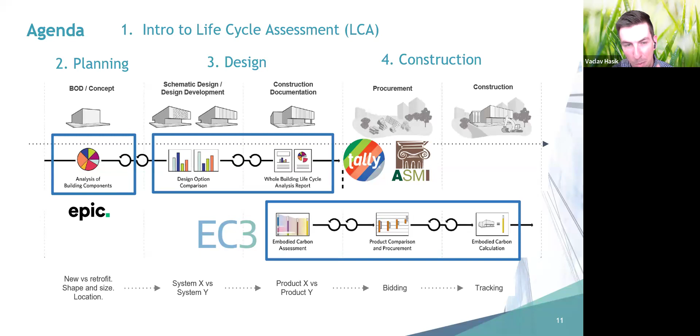The last tool that we'll cover today is the EC3 Embodied Carbon in Construction Calculator tool, which is really focused on the later stages, specifically construction and product procurement. That tool can also be used earlier in design, and I'll show you exactly how, but it really was conceived from the contractor perspective and from a perspective of actually looking at very specific product types in very late design stages.

As I mentioned, there are many other tools, so we obviously can't cover all of them today, but I hope that the ones that we cover today, since most of them are free to use, will be actually useful for you on a regular basis.

If there's anything you take away from today, I would like for there to be at least one thing that you can take to your actual practice and start implementing into your design and construction process, one at a time, essentially, in terms of trying to lower the carbon footprint of whatever you're working on, residential buildings, commercial buildings, even infrastructure projects.

So let's start with the intro to LCA, and again, this will be relatively high level. I will be throwing these terms around, so life cycle assessment, or LCA, is the general approach to quantifying the environmental impacts of products and processes. And I have a slide next that goes over the various life cycle stages. Again, this is going to be very high level.

Whole building life cycle assessment is the same exact approach to quantifying environmental impacts, but specifically to buildings. And specifically, it's typically connected to tools that have specific features for architects and engineers to help quantify the amounts of materials in a project.

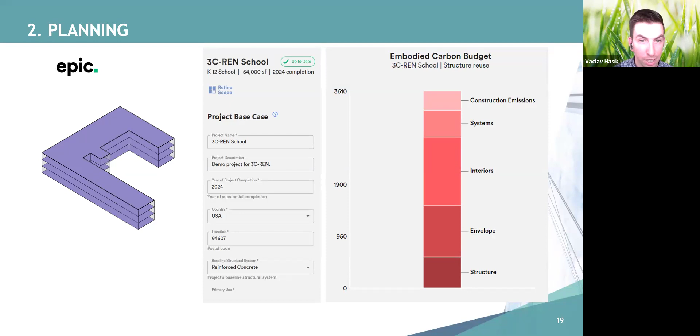So this is all based on historical results, and there are various aspects of this tool, which I'll show you in a second, that help you also preliminarily analyze, hypothetically, if you were to choose specific types of structures or specific types of design strategies, what the initial expectation of reductions or increases of embodied carbon could be.

So with that, we will be looking at a specific hypothetical project here. I am actually using one of the Autodesk Revit sample projects because we'll later on be looking at a specific Revit project. But here is the basic information about the project that we'll now be entering into this EPIC tool. So we'll be talking about an educational building. It's going to be a high school building of about 5,000 square meters gross floor area.

The expected building lifetime for the entire analysis will be 60 years, but there is a caveat with the EPIC EHDD tool, which only looks at a 30-year lifetime. There are differences for the calculation of the replacement impacts of specific materials. For those replacement calculations, you need to understand the service life of specific components, and then you need to understand what the total expected building lifetime is, right? So that's where that 60 years is important. It's also a 3-story building, and so we will have on average about 1,670 square meters of floor area per floor system.

So now that we know the basics of this building, let me switch over to my browser. If you wanted to follow along, I will actually drop the direct link to this tool into the chat box, and feel free to follow along. The address is epic.ehdd.com. Now, I've already logged in, so if this is your first time logging in, you will need to register for this tool.

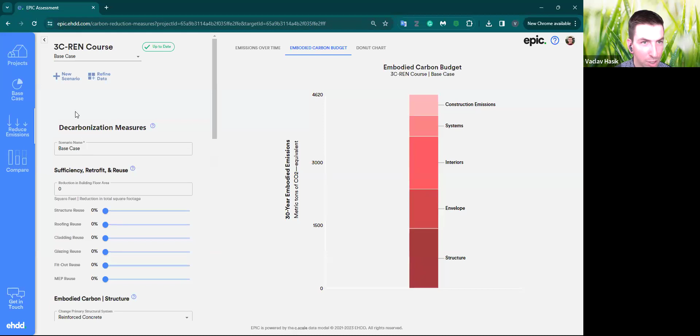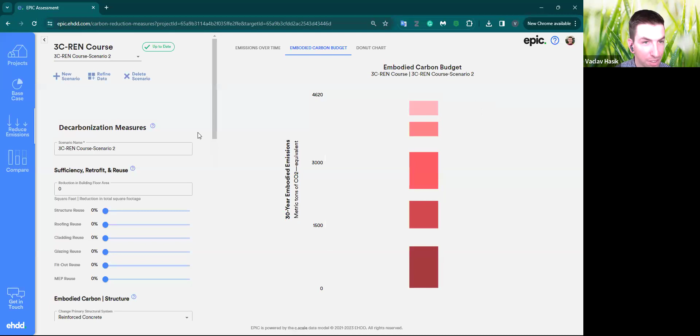So for now, I'll save this base case and I'll create a new scenario. And we'll start with a new empty scenario. This will just take the base case with all of the default settings and create a new scenario that we can now modify again. Okay, so now we'll look at another broader decarbonization measure, and that will be reuse. So you might not know this, but reusing structural systems that use high amounts of concrete and steel is obviously going to enable you to reduce the embodied carbon footprint of your project very easily, because you're essentially avoiding the remanufacturing of some of these high impact materials. We'll look at a scenario where we reuse the structural system specifically.

So I'll name this scenario reuse. Actually, reuse structure to be specific. And right now we can just use this slider. It's again very easy to use. And let's say we reuse 85% of the structural system. I'm using this based on one of my previous projects, where I worked on an adaptive reuse project where we reused pretty much the entire structural frame of a building. And in that particular project, we were able to reduce, or essentially avoid, about 75% of the embodied carbon emissions.

In our case here, if you reuse 85% of the structural system, you can see that we achieved a reduction of 1,430 tons of CO2 equivalent already. So it's not quite 75%, but the reason for that is because this is including a lot of other systems that I didn't actually include in my previous estimate. My previous estimate was in structure and envelope. This is including MEP systems, interiors, and other things as well.

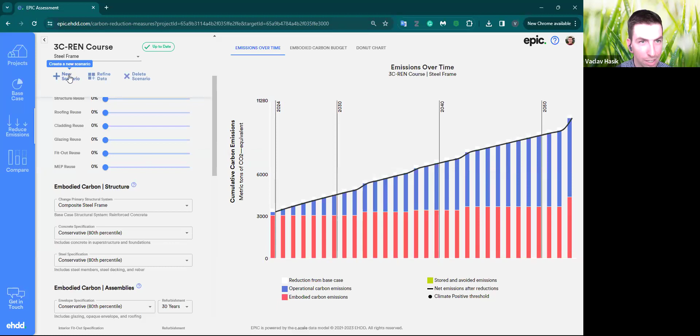Okay, so now let's try and see what mass timber impacts would look like. So we'll create another new scenario, new empty scenario. And back under the embodied carbon structure, we're back to the default, which is reinforced concrete. We'll click on mass timber, click away. And again, you see a little bit of a reduction, but not too large. So you see 210 tons of CO2 equivalent.

Usually bio-based products or wood-based products do have lower embodied carbon footprint because the production impacts or the direct emissions during production are not usually as high as steel and concrete. In this case, for some reason, the reduction actually wasn't that large. It may be because the amount of mass timber actually needs to be larger than some of the other materials to support the same loads within the building. But that's currently just a hypothesis that I have.

Again, this is based on historical amounts of material quantities for specific structural systems. So when you're looking at these specific designs later on, the numbers might vary a little bit more.

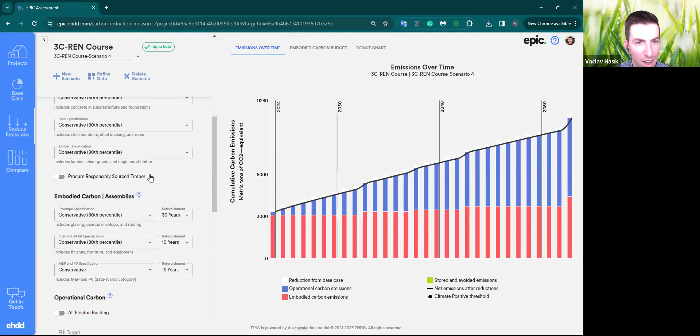Now, okay, so let's say we also wanted to specify that this mass timber was actually procured from responsibly sourced timbers, so something like an FSC product. And in this case, I'll create this as a new scenario to be able to show you the differences in those final results later on. In this case, I'll actually copy the current scenario with the mass timber structural frame so that we don't have to make that selection again.

But we will add the differentiation here that the mass timber frame is actually with FSC wood that has chain of custody certification. In this case, if you click on the procure responsibly sourced timber here, you can potentially claim additional reductions, basically the amount of carbon sequestered in the wood itself. But you need to understand that in order to be able to take that credit, or to tell people that there's actually sequestered carbon in your timber, you need to make sure that that timber is sourced from sustainable supply chains, from sustainable forests.

So essentially, this tool is just telling you, you want to make sure that you do your due diligence when you're sourcing the materials, that it checks all these boxes. This is essentially saying that you cannot claim that carbon sequestration unless that wood in the forest is actually replanted and that tree can regrow in the forest. This is to ensure that you're not contributing to deforestation, essentially. This is a little bit of a tricky topic, so that's why this checkbox system and not something more sophisticated.

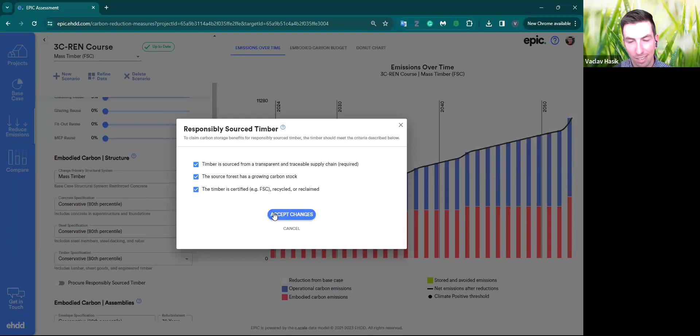There are currently still ongoing standardization efforts and accounting methodology efforts around standardizing the way that sustainability of wood is actually captured in EPDs and life cycle assessments. So these checkboxes and your individual due diligence is all you can do here. And you can see that in this case, we actually get this yellow negative value, which is called stored and avoided emissions. And in this case, it's about 760 tons of CO2 equivalent that actually gets stored in the building in that mass timber.

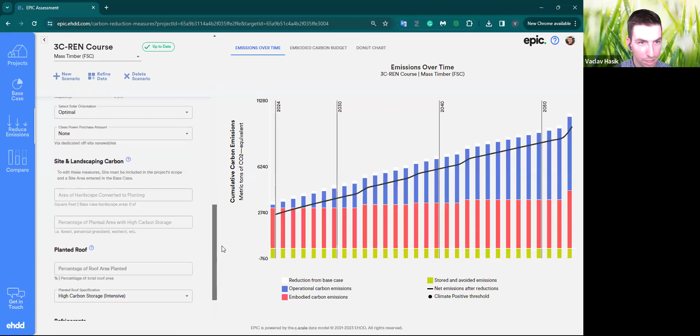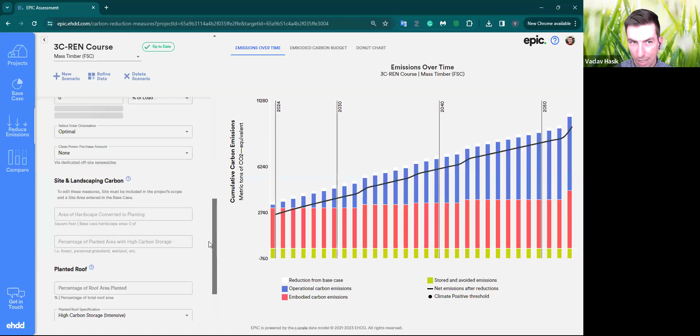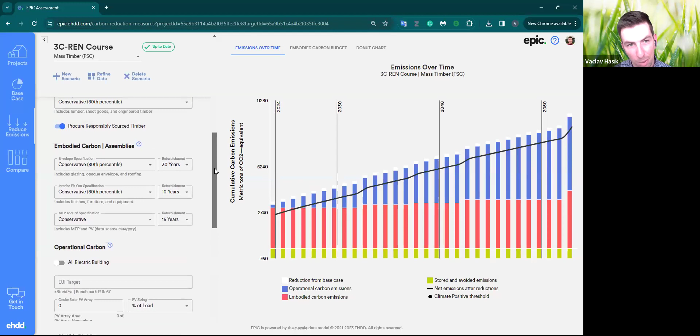Okay, so now we've explored a couple of different scenarios. I think I saw someone in the chat actually asking about low carbon cement products. And the answer is that there is an option in Epic to select low carbon concrete specifically, or at least lower carbon concrete, but you can't select specific product types. So I think Sublime here, that's a specific type of product from a specific manufacturer. You won't be able to actually select that specific product, but you will be able to try and see what a low carbon concrete would do if you were still, for example, using that concrete frame.

So we'll go and create our last scenario for this analysis. We'll click on new scenario here, new empty scenario, and we'll say low carbon concrete.

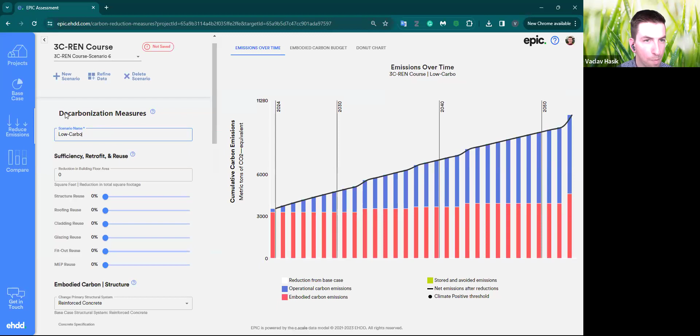We will stick with the reinforced concrete structure, but here under concrete specification, we will actually say low carbon. So 20th percentile will essentially lower the emission factor per unit of concrete on the project to one of the lower impact concretes. And in this case, again, you see a little bit of a reduction of 170 tons of CO2 equivalent. So not as big as reuse, but it is going to be significant when you start looking at just the structure and just the concrete specifically.

You can probably lower the impact by about 20–30% just if you're looking at just concrete on this project. We'll get to some of the specific amounts of reductions per material type towards the end of today's course as we start looking at specific product types using the EC3 tool. So we'll come back to this again.

Now, I mentioned earlier that when you're looking at these different scenarios in the Epic tool, you can switch over to the embodied carbon budget section. And here you can see the impacts from the specific systems within the building. And this is going to be important later if you're trying to actually compare your early Epic estimates to other estimates using other tools. You will want to make sure that you align the scope of the analyses as much as you can. So for example, later on, we will be looking at impacts from the structure and envelope only. And so in those cases, when you're doing the comparison, you would want to take only the structure and envelope impacts from this Epic tool.

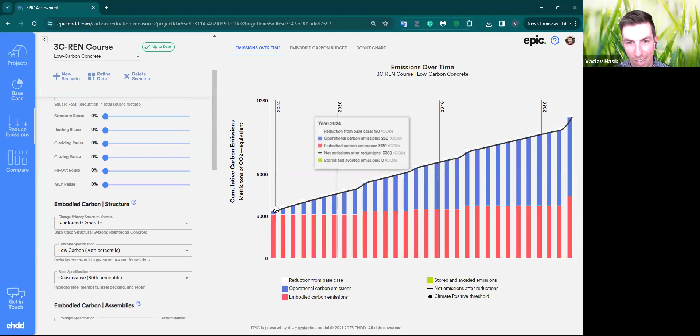Now, we defined a bunch of scenarios and we looked at the reductions for each of them one by one. Now, let's take a look at them all at once in this compare section. So now I click on the compare button here. You can see the base scenario right away, and then you can see the other scenarios that are selectable down here. So we had the copy of the base case, reuse scenario, steel frame scenario. This one I didn't actually rename, but I think that was the mass timber scenario, mass timber FSC, and then low carbon concrete. I'll start showing all these scenarios, and now you'll be able to see side by side how they actually compare over the full 30-year lifetime of this project.

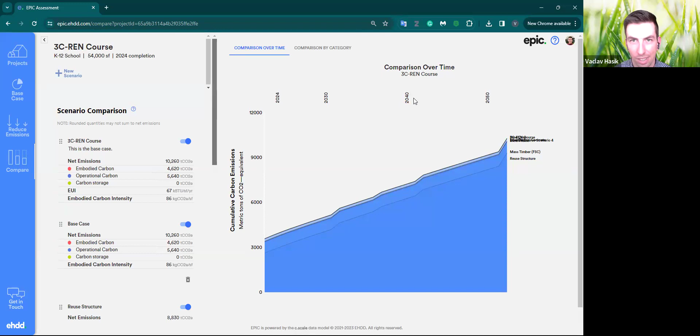You can see that the reductions are not all that great, but again, if you only look at the structural systems, for example, those are actually some significant reductions there. You can also look at it by category, and so you can see the differences in the embodied emissions in the pink here a little bit nicer. You can see that the reuse of the structure really had the largest change for the embodied carbon aspects. And again, you haven't really touched the operational emissions, but if you wanted to use this for a holistic carbon footprint analysis at the planning stage, you can make some additional tweaks for the operational aspects.

Now, at this point, if there are any questions so far on the use of the tool and how you basically get the initial estimates of the embodied carbon footprint, let me know. Otherwise, I will switch over to a Word document. Let's see if there's any questions first.

Is this program accessible free of charge? Yes, it is. So most of the tools that I'll cover today are accessible free of charge, or at least have a free trial.

Okay. I think some of these other questions on specific types of materials we'll be able to come back to later as well. But what I wanted to mention here is, okay, well, you have this planning tool. Where might you be able to use it in terms of your basis of design or contract language?

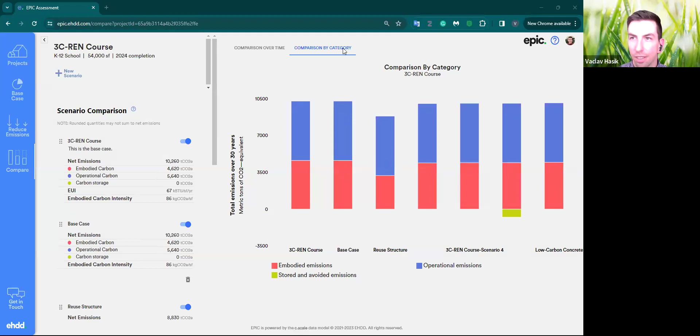So let me switch over to the PowerPoint presentation again. And we'll switch over to the next phase of design, which is typically design development and schematic design, right? So this is where you might start actually understanding more of what the individual assemblies on a project are. Some of you may be using Revit, which is what I'll start with today, but I'll also show you some tools where you don't need to have a Revit model. You can still do some of the more detailed and specific analyses once you start having a more specific idea about the design of your building. You can do these embodied carbon assessments in a variety of ways.

The first tool that I'll walk through is Tally LCA. This is our own Building Transparency tool. It was actually started by an architecture firm out of Philadelphia, KieranTimberlake, around 2016. So it's been around for a while, and it's really focused on making this process of assigning specific material impact information to a Revit model very seamless. And also it provides a nice library of specific material types, and then has a pretty comprehensive, but also not overwhelming report, I think, for anyone that's trying to address life cycle assessment on embodied carbon for the first time.

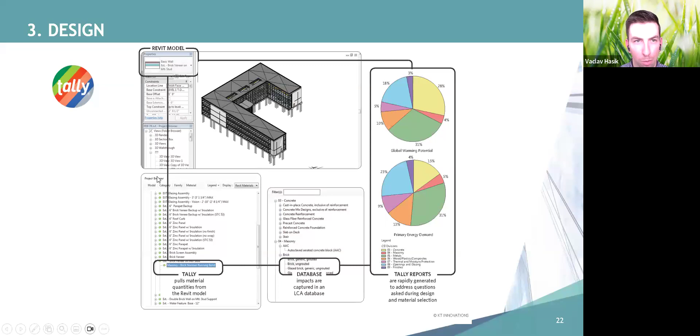So what this tool does is it takes some of the existing dimensional and material information from a Revit model. It allows you to connect the Tally material library to individual elements within the Revit model, and then generate these Tally reports. So I'll switch over to my Revit interface.

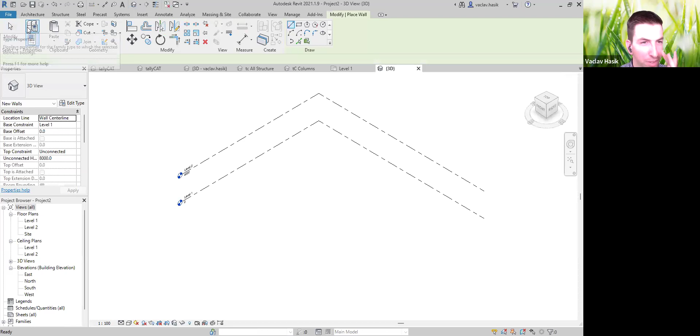And again, the idea is to take all of the native features of Revit in terms of modeling, and just add a little bit of additional feature in terms of the environmental impact assessment using the Tally add-in. So at this point, I'll just do a simple example where I'll place a couple of wall systems here.

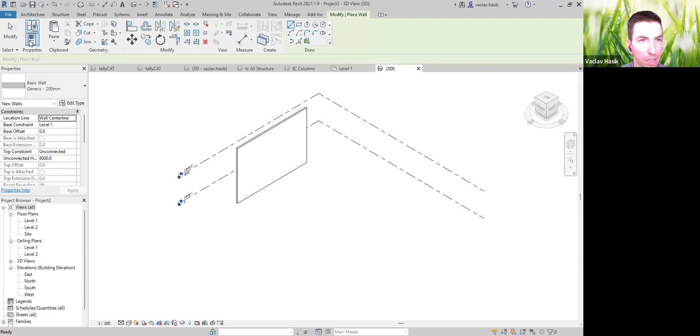So I'm placing one of the basic generic walls. Again, you don't need to actually define any of this yourself. If you're starting with a blank slate in Revit, you will have some predefined families already available. I just clicked on another wall system, and we'll add another type of wall into this project. So we'll do, for example, this exterior brick on metal stud. And we'll just do the same section of the wall, and that's it.

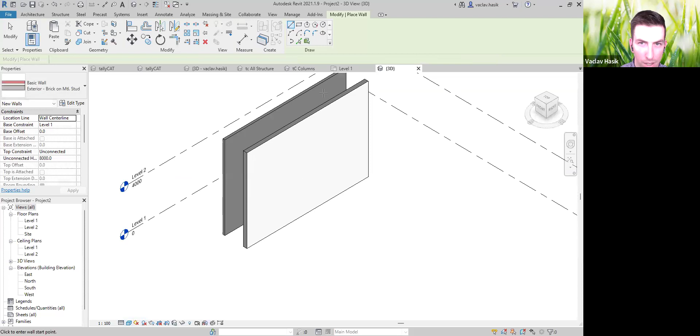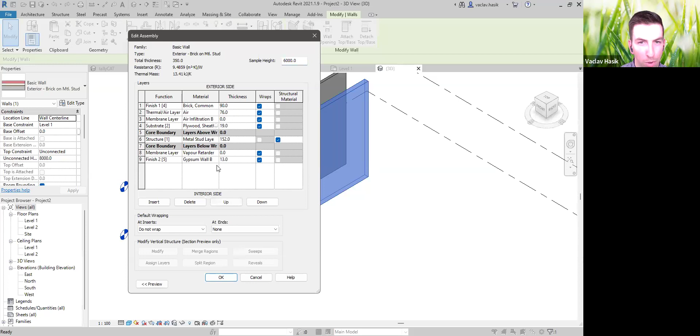Look at the consistent colors here. You can't really see right now that there are multiple layers, but if I actually click on one of these wall systems and then go into the edit type section, and then into the structure section, you will see that this wall system has about 7 individual materials within it. And you can see that there are specific thicknesses of each of these materials. So we have brick, air barrier, plywood, metal stud layer, vapor retarder, and gypsum wallboard. So again, this is the way that the Revit wall family was actually built.

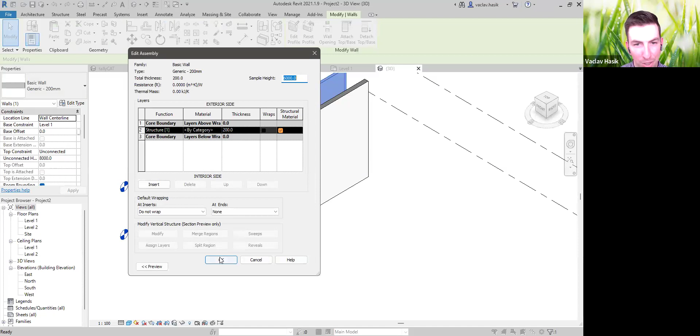Okay, now the other wall system, if I click on it and edit type and go into structure, you can see that this one only has 1 layer. That's just the basic generic wall. And it actually doesn't have any material assigned to it, at least the Revit material. So we'll just leave it at that, but just keep that in mind as we switch over to Tally LCA.

Now, to start Tally LCA, you would go into the add-in section here, and you can go into the Tally LCA. We'll have this colorful icon here called Tally. You can click on that, and it will bring up the Tally LCA plugin. Now, when it says downloading updates, that is the only time that the tool actually goes into the cloud. It's downloading all of the materials in the Tally library and the associated environmental impact information that's in our database.

When you're actually working on your projects, all of that project information just stays within the Revit file itself. It's not actually sent anywhere outside of your computer. It's not stored in any of our servers. Sometimes I get that question from Revit users for security purposes. So all of the information stays with the Revit file, and you will want to save the Revit file itself in order to save all of the lifecycle assessment work that you're doing in Tally.

The first step in Tally LCA is selecting the object of the study. The most typical object of study is going to be full building study. This essentially just takes account of all of the placed elements in the 3D space, and then you will be able to assign material information to the individual elements. The next step is selecting the scope of the study. So again, like I mentioned before, you have structure, envelope, interiors, MEP systems, site elements, etc. The list of categories that you see here is the full scope that Tally LCA is capable of helping you assess. So it doesn't actually include any MEP systems.

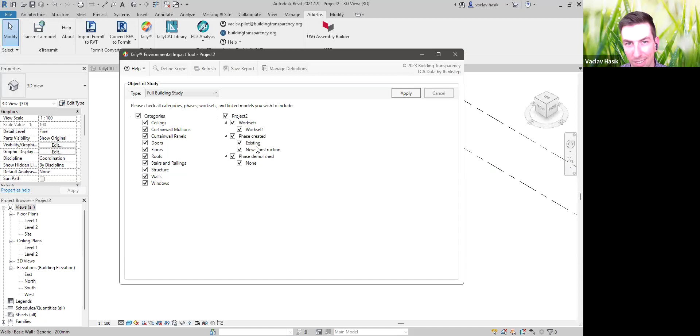And then you can include or exclude based on some of those characteristics that each element has assigned to it. Once you select the scope of the study, click on Apply. Now the tool is collecting all of the dimensional information for the various elements that are placed in the 3D space. And the next step is assigning material information from the Tally library.

So you go and we can see those two families that were placed here. And if I open up these triangles, you can see the individual layers within that family. So this is what I meant when I said that you do need very detailed information for being able to do the life cycle assessment. Each of these layers is going to have very different mass, very different volume, and very different environmental impact information, right? And so you do need to understand each of the individual layers in a realistic wall system.

You see that in this generic family, we do still see that one layer, but it doesn't actually say what the material is. It just says by category. And so I'll show you how you can address an assembly like this. But the next step would be, again, assigning specific materials from the Tally library. So you can right-click the individual elements, click on Edit Definition. And now we were looking at a brick element, right?

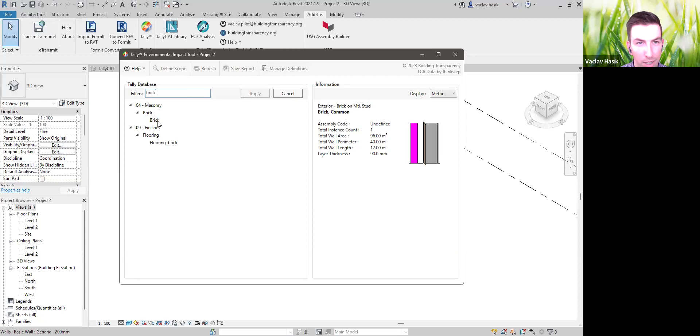So I could go into masonry and I could just try and find brick in the library, where you can type in brick in the filter here, and it will find you a couple of different types of brick that you could select from the Tally library. In our case, we'll select brick, click on Apply, and then on the next window, you will need to select a more specific type of brick, because again, even within just saying that you have a brick, there are many different types with different manufacturing processes, so the impacts can be different.

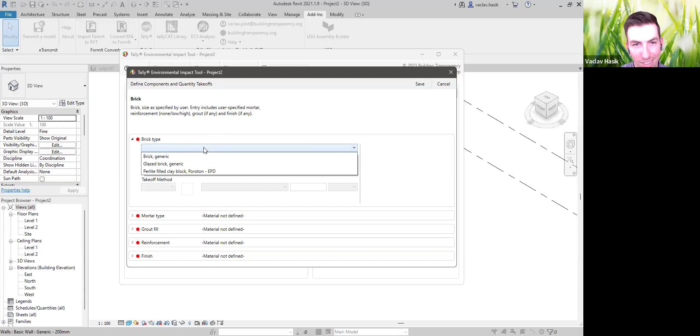If you don't know which type of brick you should select, the first one is usually the most generic data source that you can use. You can select various service life. This is again for calculating the replacement impact, so we'll just keep that at default. And then you would also select the takeoff method that you want to use to get a realistic quantity takeoff for this type of material.

As you may know, in Revit, some of the modeling is simplified. So sometimes you just specify what the thickness of a layer is, but there is no understanding that, for example, studs are not actually the full volume of a wall system. They're actually thin amounts of metal spaced a certain amount of distance from each other. So Tally LCA helps you address some of those specific and realistic ways of quantity estimating some of the material types. We'll go through studs specifically in just a second, but this whole interface is set up to help you define the additional information you need to get the accurate quantity estimates for your building.

So in this case, you usually have multiple takeoff methods you can do. If you think that the modeled layer in Revit is accurate to how the product actually is produced, then you can simply use the takeoff method that is typically first or the most straightforward. In this case, you could just take the full volume of that one layer and assume that it's a solid brick, right?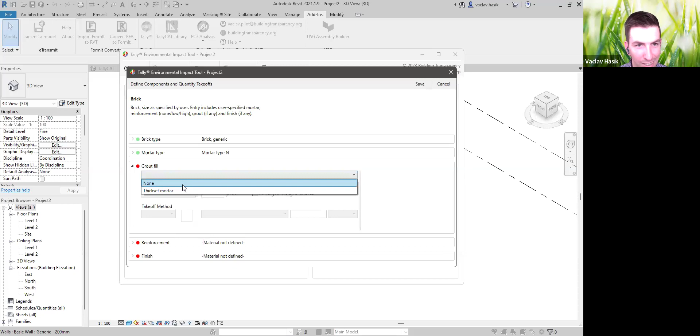So you can select different mortar types. I'll just randomly select some of these. You can do by volume again, and then we can select the same joint size here. And that fills in the rest of the volume of the wall system with the mortar. You can also add grout, again, just the same exact way. Different takeoff method options. And in this case, it's taking it into account 16% by volume.

And you can also add reinforcement, etc. I think you get the point at this point. You can add additional materials that would be within the brick layer in a wall system.

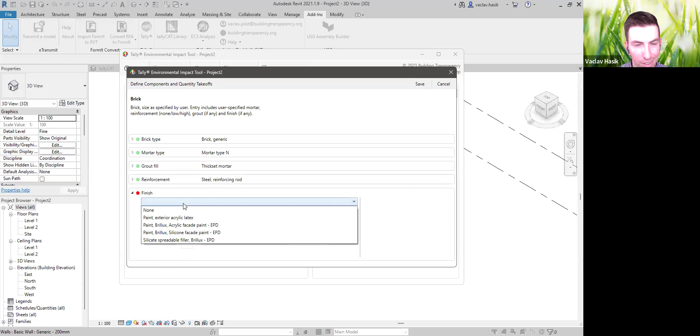We'll do some predefined reinforcing amounts, and then for finish, I actually won't. I don't want to add any finish, so I just click on the none selection here. Save that definition, and at this point, this will turn green. That means we've addressed that layer.

And you can see the amounts of individual materials in terms of mass. You can also see the takeoff methods that we used and how we defined the materials. You can see the full list of individual accessory materials added.

If, for example, you have something like this, where you have air, it's essentially just an empty layer, you can set this layer as a dummy material. That essentially means there are no impacts associated with this layer, but it just means that you've checked it off the list and you can keep going down in terms of defining additional material types.

I will define one more type. So this metal stud layer, I mentioned that earlier. We'll click on that, edit definition. I'll search for stud layer, C-stud metal framing. There's also an option with insulation. So you can either have just the stud or you can have the void filled with insulation here. I'm just going to go for the regular stud without insulation.

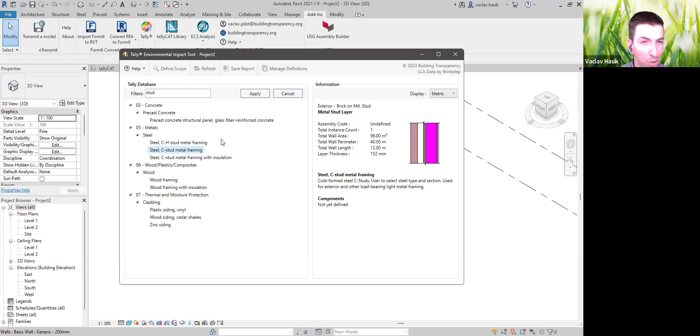At this point, I can select the material type. Again, the most basic one is the first one. And in the takeoff method, instead of doing by volume, which would just take, again, the full volume of the layer and grossly overestimate the amount of metal, instead I'll do this takeoff method by spacing. And so in this case, I can select from a predefined list of stud profiles.

In my case, I don't actually remember what the actual model thickness of the wall system was, but let's say it was 3 5/8 inch, 20 gauge stud. Now I can select the spacing and I can include or exclude perimeter members here. So let's say it was 16 inches on center. I can save that. Come back here and we have 209 kilograms of cold formed structural steel in the framing based on those definitions.

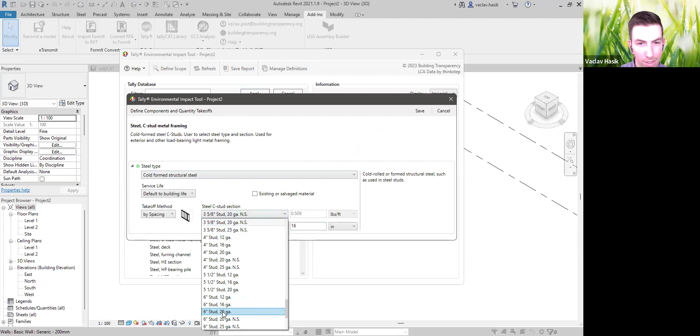Now, if I wanted to actually compare, the layer thickness is about 6 inches. So this actually doesn't quite match up with what the modeled thickness of the layer was. So I could go back, right click it, edit definition, apply. And I could actually specify that the profile was more like 6-inch stud, 20 gauge. Save. And you can see that this is 987 pounds of cold formed structural steel.

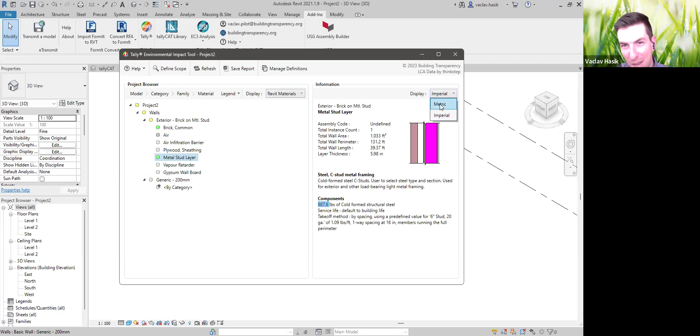Actually, I've been switching between imperial and metric units, and apologies for that. There's a lot of overlap or changes and mixing of the units that you will see in life cycle assessment, unfortunately. But most of the tools try and give you tools to be able to switch from one unit system to the other. So I think originally we had something like 200 kilograms of cold formed steel. Now we have 448. You can see almost double the amount.

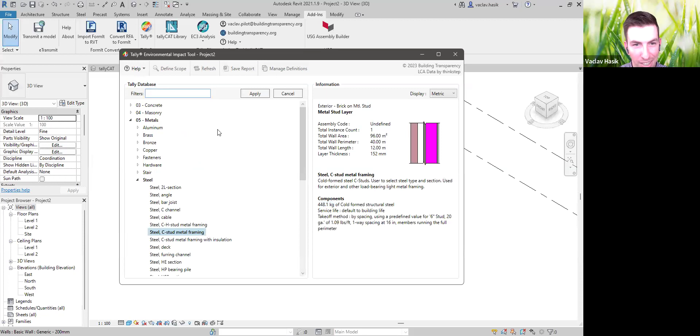Again, just to make the point clear, if I went back again, did a takeoff method by volume, just did 100% by volume, I get 114,000 kilograms of cold formed structural steel. So that's obviously incorrect. So this is just a couple of the features that the tool has to help you come up with the right quantity estimates in your project.

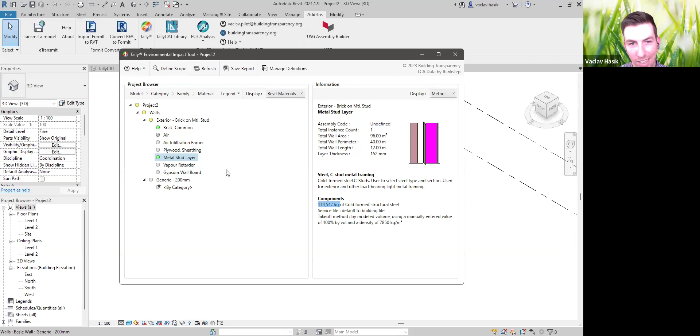In this case, with the assembly where we didn't actually have specific layers, I won't be able to edit definition here because the Revit material is not specified. So either I would need to select that element and then go back and edit the type in Revit and select the specific Revit material, or I could just add additional accessory materials in Tally LCA without actually modeling anything in 3D.

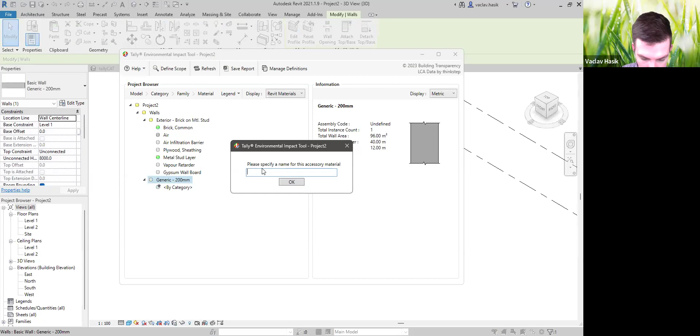So I can add accessory material, say we have a stud layer, and now I can go through the whole stud layer definition process all over again without actually having anything modeled in Revit specifically. So you can start doing some of these assessments even in early design before actually having any of the layers fully defined. You can start exploring what the impacts could be.

So now that we've walked through the basics of how to define materials, are there any questions so far? I'll switch over to the fully defined model and start actually looking at some of the results from Tally LCA. But if there are any questions so far on the material assignment portion, feel free to let me know.

Oh, here we go. Can you upload EPDs to Tally LCA? Currently, no. There are a couple of EPDs, as you probably noticed, but those are more legacy EPDs. Tally LCA is focused on, again, the earlier design phases, and it's really focused on giving you an assessment of the average impact of individual materials based on the general market conditions. So most of the EPDs that you will see here are going to be industry-wide EPDs and industry average impacts of the individual materials. You won't see too many product-specific EPDs.

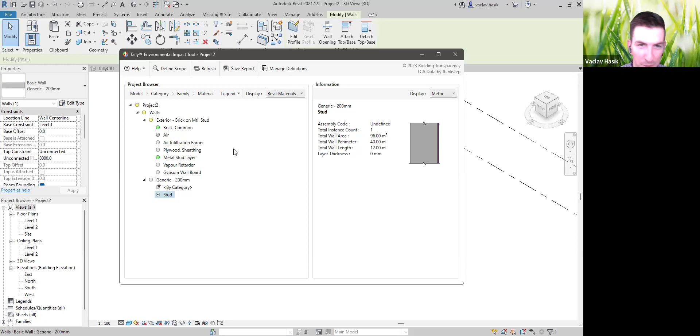When it comes to the non-carbon footprint impacts, which you'll see in a second, like acidification, eutrophication, etc., the life cycle assessment system is more all over the place, and there isn't a clear translation or conversion that you can do sometimes from one unit of, let's say, acidification to another unit of acidification. But again, it's a larger topic. What we actually plan to do with Tally LCA in the future is potentially give a carbon footprint specific option, and in those cases you would be able to use some of the EPD data. Again, we'll come back to using product specific EPDs when we start talking about the EC3 tool as well.

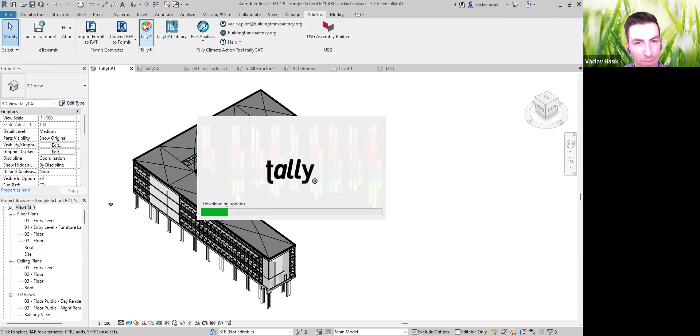Okay, so now let me switch over to the fully defined model that I have here. So again, this is the Autodesk Elementary School sample project that you can access yourself as well. So if you wanted to try this on a sample project, you could try and define the whole project yourself. I'll reopen Tally LCA here on this project. I'll go into the full building study. Again, select all of the categories, all of the work sets. You actually see that I have more work sets defined here. And I also have a linked model, the structural model. So I'm now including a separate structural model as well as the architectural model, which focuses on the envelope and some of the interiors. Click on apply.

Now this will take slightly longer than the last assessment with just the two wall systems, because we have way more elements in the project. But even on large projects, this shouldn't take more than about a minute. At this point, you can see that we have more of these categories here. The linked model I can see, but I cannot modify the elements. So if you wanted to, for example, change the definition of the cast in place concrete in the structural system, you would have to open up the original structural model to edit it. Once it is edited, you can create results from both models all at once. It's just the editing part that is not accessible here.

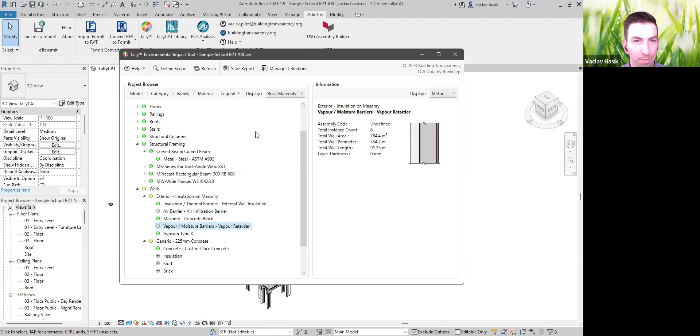And you can see that all of my categories are green. That means that I've defined all of the individual layers, except for the wall system. So it looks like I didn't finish something here. So this would be a quick way of seeing, yes, there are a couple layers that were not defined. I should probably address them. In my case, I'll actually skip over this, and I want to get to the results part of the tool so that you can start understanding where some of the contributions from an embodied carbon perspective are coming from. So we'll go over to save report here.

Now here you fill out similar basic information about the project as we did in the Epic tool. So you have the title of the building, author, project address. You can add an image as the cover. And you do want to fill out the gross building area, because once you start comparing to other projects, or even to the initial assessment of the Epic tool, you probably want to do that on a per unit area basis, a typical way of comparing results. And again, you have the expected building lifetime here.

The default is 60. You can make this any number that you want. But again, for something like, let's say, LEED certification, they will actually ask you to use 60 years. Most of the certification schemes will ask for 60 years.

And then in the goal and scope, you would just describe exactly what you were doing in this assessment. For example, was this an early design development assessment where you were just quickly trying to fill out all of the individual layers? Or is this more of a construction documentation phase where you've actually gone through each layer, documented or cross-checked everything with construction documentation? And so essentially this is more of an actual design that you are then handing over to the builder, right? So you would want to specify all of that here. I'm just gonna type in test and skip over that.

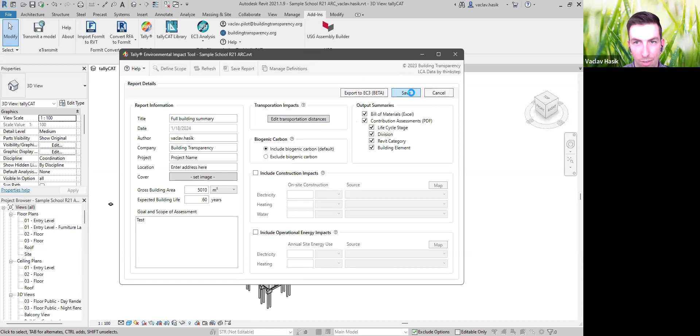And to generate a report, you would click on Save Report here. So we will save a building design one. Okay, now Tally is saving two things. It's saving a PDF report and an Excel report. The information is exactly the same in both places, but the PDF report has all of the methodological information, all of the text and write-up that you would probably want to have if you were handing this over to your client, or for something like the LEED submission. It includes all of the documentation with all of the details of how the tool works as well, and all of your specific material selections.

For the Excel part of things, it's basically just giving you all the detailed results. Not sure why this is stuck right now. Got stuck because I had the same PDF report already open. So anyway, you get the PDF report and the Excel report. The Excel report just has everything, all of the numbers accessible to you, so you can potentially create your own diagrams if you want.

I'll start with the PDF report. So here, this is blank because I didn't actually provide an image of the project, but you could do that. On page 3 is where you see the first set of results from Tally LCA. So here, you can see the upper table is the absolute values, and we include the global warming potential as well as the additional environmental impact categories, which is something that I just mentioned a second ago. Again, embodied carbon footprint is the global warming potential part.

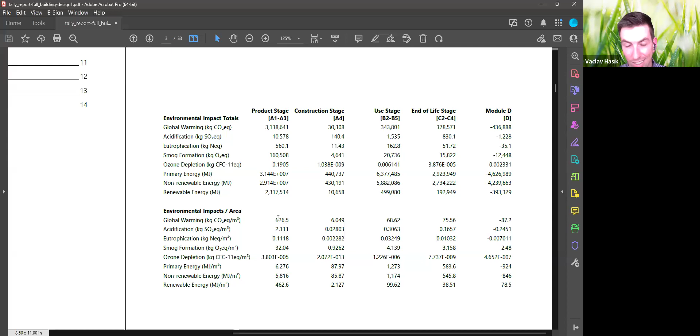Typically, the early estimates from tools like Epic just have also large uncertainty, which is not necessarily shown. So I think the typical range can be plus minus 25% from those early estimates. And I think this is within maybe a 20% difference, if I remember correctly. So those are just some of the things to keep in mind when you're actually switching between one tool to the next: some of these differences in the quantity estimates and in the total impacts.

And so now knowing this, we could do a couple of things. We could see, okay, are these systems where we could actually substitute concrete with some other material? Or later on, once we actually look at EC3, maybe we could just tell the concrete suppliers that you are calculating the embodied carbon footprint of your project and ask for suggestions on any low carbon mix designs that they may provide. So those are two options that you could do.

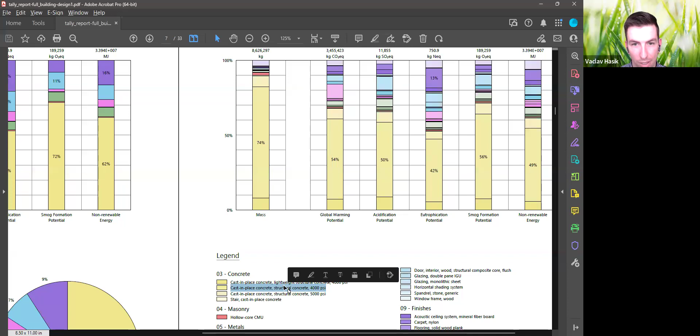So in order to know where this cast in place concrete is actually within the building, I can go to the back of this report and look for concrete cast in place 4,000 PSI. Going into the documentation section in the back of the report, going to see structural concrete 4,000 PSI. And now I can see where exactly that concrete is. So it's in the concrete deck. It looks like probably some wall systems here, or probably some floor systems. And then the concrete frame.

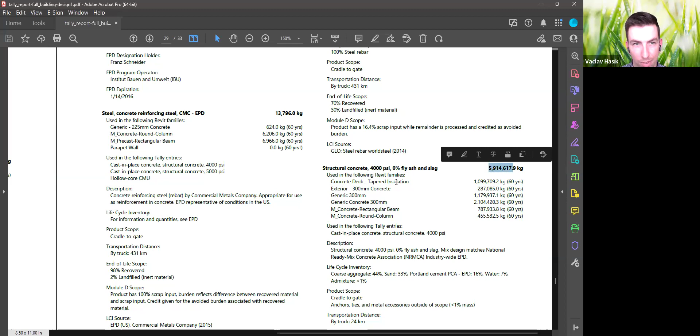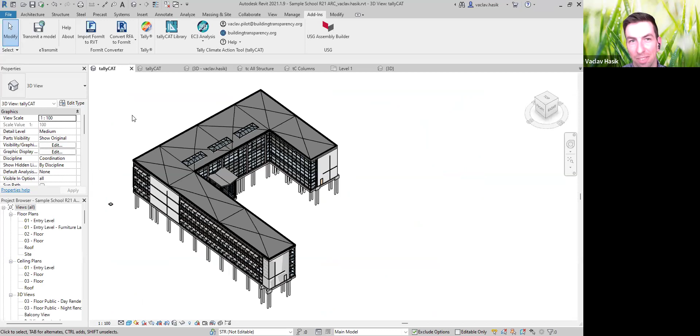Right, so you can see that you have 5 million kilograms of concrete. That's a large amount of concrete on the project. Okay, so what we could do from a design perspective is consider some alternative designs, probably for the slabs or for the frame. Now this can get pretty complicated, so I won't go into the details of how you actually come up with different structural designs. But if you did have different structural designs modeled in Revit, you could do that quick comparison

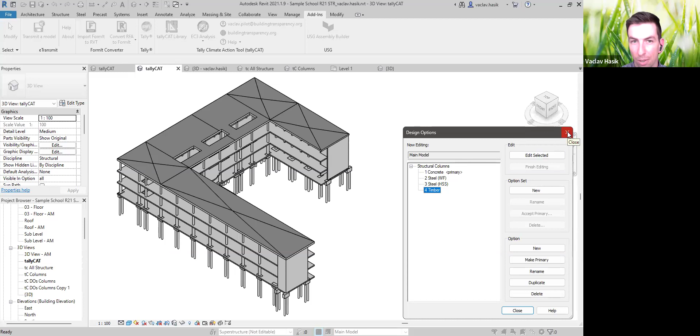again using LCA. So I have my structural model here, and in the Revit design option comparison section, I have 4 setups of different structural systems. I have concrete, steel with wide flanges, steel with hollow sections, and then timber frame. Now keep in mind, these are not actual designs, so some of the results may not be realistic, but this is just to show you how you would go about using the tool to actually compare some of these design decisions.

So I have those designs selected. I can actually show you if I switch the design options in Revit. You can see now we have the wide flange sections. And now we have the timber frame sections. And if I go into Tally LCA again, I could now go into design option comparison, select all of the design options, click on apply.

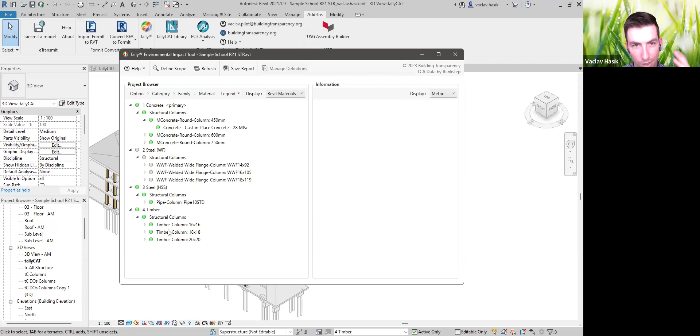Now I've already gone through this exercise once, so I've defined most of the materials on this project. I actually changed the wide flange sections, but that's okay. And so you have all of the materials defined on the 4 different design options. At this point, you can save a report. I'll streamline this a little bit. Save the report.

Okay, and now we have a similar PDF report, except now you will see multiple design options here lined up side by side. So we'll go to one of the additional charts here. Look at it by material type. You can now see option 1, concrete, option 2, hollow structural sections, and option 3, timber. You can see the impacts from a global warming potential perspective of these different entire structural system designs.

So this is another way that you could use Tally LCA. And at this point, if you do compare one set of assemblies or structural systems, then you can make a design decision to, for example, go with mass timber frame, right? Or you can go with a specific type of envelope system or exterior wall system that seems to be the lower carbon footprint. Again, understanding that these are all using average material impact information. There will probably be an additional step where you can add additional carbon reduction aspects once you start selecting specific producers of some of these materials.

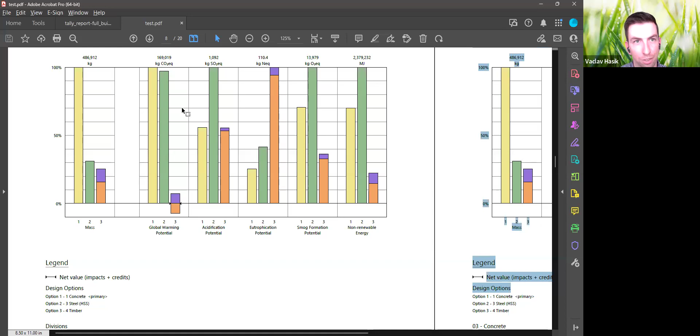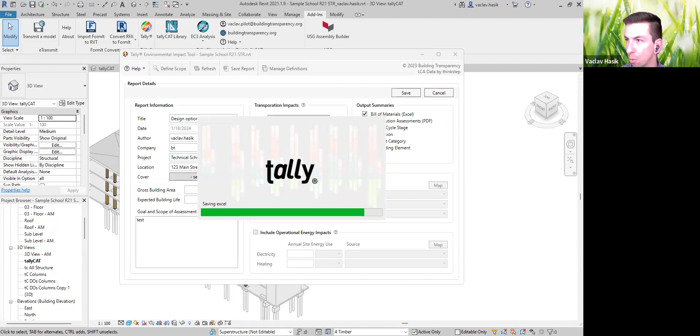So at this point, I think we kind of wrap up the design phase of how you would go about doing an LCA on a building from a design perspective and actually compare different design options. I'll open it up to questions, but I also want to stress that, again, you don't have to use Tally LCA for this. There are many other tools. For example, the Athena Impact Estimator, which is a standalone tool, allows you to do some of these comparisons as well. It's just the process of defining the materials and estimating the material quantities is different.

You can also use tools like the Payette Kaleidoscope tool, where someone else has already gone through the process of having assemblies put together, Tally materials assigned to them, and then just gives you the final results of all of the different assembly options. So I'll change it over to Kaleidoscope carbon. I'll drop the link into the chat.

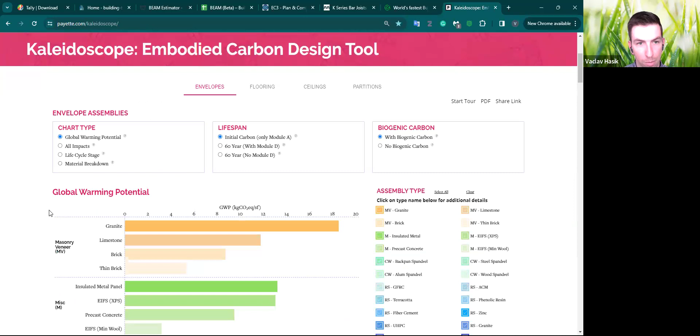And here, you actually don't need to model the entire building. You can just go and look at some of the predefined designs that the Payette architecture firm has put together. You can quickly see the overall carbon footprint of some of these systems, including all of the various layers that would be typically included in these systems. So again, if you have your own standard systems that you use within your design firm, then you can use Tally LCA to do it yourself. Otherwise, if you're just looking at other people's work, this is a great resource as well for you. And this is, again, completely free to use.

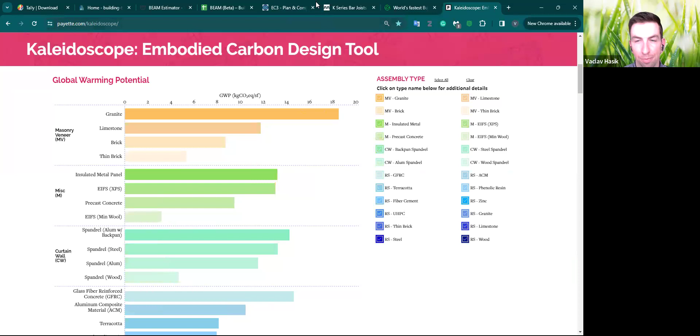Any questions for the design aspects from anyone? If not, I'll switch over to the last portion of this whole walkthrough, and that is the product-specific material selection and anything that you would do at the construction phases. Vaclav, there is a question about purchasing carbon offset credits and if that could factor into embodied carbon calculations. Yeah, that's a great question. So carbon offsets are typically not allowed in EPDs or in whole building LCAs.

Now, we do get this question more often nowadays as more people are interested in this, right? They typically try and address the energy efficiency of their production lines the best as they can, and then they try to get to a net zero operating company by purchasing offsets for the rest. But normally you wouldn't actually see those carbon offsets reflected in EPDs or whole building LCAs because it's definitely not a robust enough system right now. So yeah, typically you wouldn't actually come across carbon offsets in terms of whole building LCAs or product LCAs. It typically happens more when companies are trying to make claims about being net zero companies sometimes.

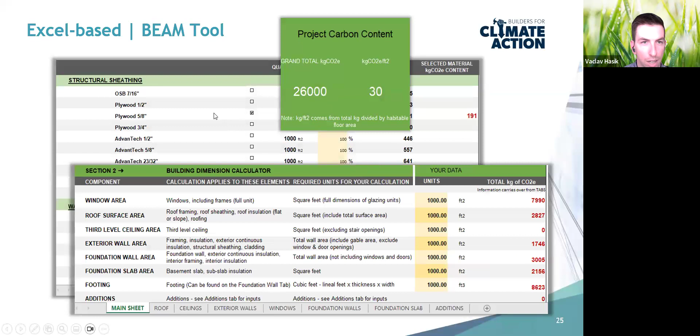And let me switch over to here. So now, what do you do in the construction phases where most of the design is probably set, right? You can't do too much about changing the actual structural frame or the shape of the building and different systems. All of the material quantities are pretty much set. What do you do then?

You can still go and compare products for the materials that were put into the design drawings in the first place. And you can still sometimes find a good amount of reductions just by selecting specific product types or specific manufacturers of those products. So this is where EC3 comes into play. EC3 gets all of its data from environmental product declarations, and it's just focused at this point on the carbon footprint because that's where EPDs are actually aligned.

And it's trying to give you this understanding of, let's say you need the embodied carbon footprint of 1 meter cube of concrete. There is actually a wide range of potential impacts per unit of concrete that you can purchase on the market. And so EC3 will allow you to understand that range.

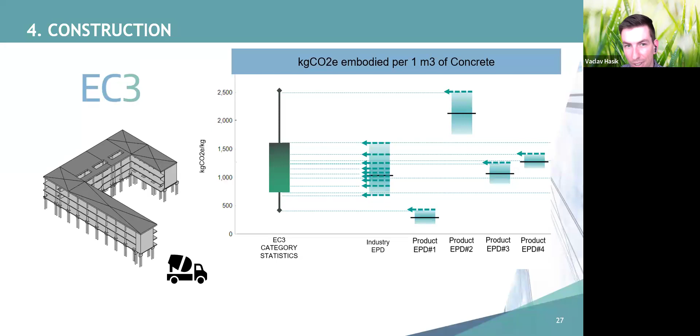It also allows you to now take a look at individual product options that are on the market with EPDs and potentially either set specific thresholds for the carbon footprint of a unit of material, or actually put into the specification the preferred products that you want to put into your building. So there are multiple approaches. It just depends on what type of material or product you're talking about.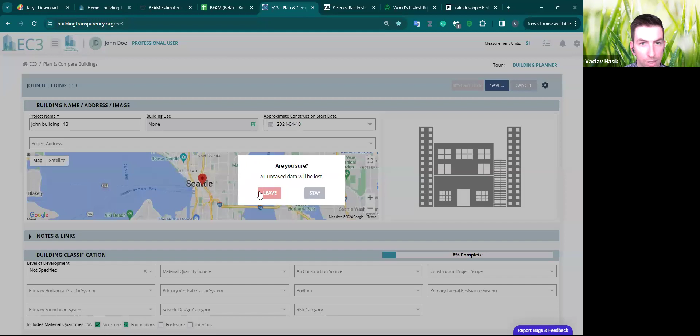So now let me switch over to EC3. You can get to EC3 by going to buildingtransparency.org. And then you can register for free. Again, this EC3 tool is completely free to use. And then you would just sign into the tool. I'm just going to open up my other tab here, go into the landing page.

So on the landing page, you will see where most of our data is actually coming from. We include EPDs from around the world, but we really started with focusing on North America. That's why you see the most EPDs in North America. You can also see which product categories we have the most data for. So concrete, finishes, thermal moisture protection, asphalt, steel, etc. All the high impact categories we actually have the most data for, which is good. There are some categories that have less data, but there's more and more EPDs that are coming online.

Now you can simply look and see what we have in terms of EPDs in the individual categories by going into find and compare materials, and go into the material categories, for example, reinforcing steel, select that category, go into next. Now, don't get overwhelmed by this page. You could simply click on the search button here, and that will search for all of the EPDs within the rebar category.

But when you're doing these searches for materials, and you're doing LCAs, you always want to make sure that the performance characteristics of those products actually meet the design intent and the design requirements, right? So that you're not actually designing with less quality products, or for example, that the compressive strength of your concrete doesn't actually meet the specification. So that's why we have some of these selections here. You can go and look for specific products that meet the performance specifications. In this case, we'll just go with the basic search without any specific performance specifications.

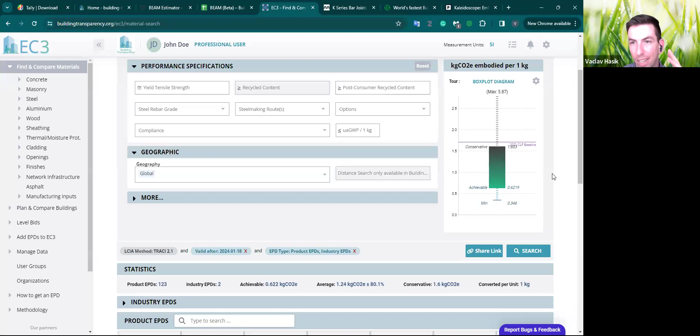And this is where you can get that information. Now, if I scroll to the bottom of this page, you actually see the individual EPDs listed one by one, and you can see the GWP values here in this column. Now you can see that in this case, we also have a lot of non-US based products.

So I could go up here and select geography Americas, or I could go even further, North America, and click OK, redo the search, and find those same products. Now you see that this range of realistic values is actually adjusted to represent just the products that are actually made in North America. If I scroll to the bottom, you can now see that all of these are made in North American mills.

If you wanted to compare individual products, even though you can see the numbers here, you can click on the compare button. Oops. I double clicked it, so it went back. You can click on the compare button and select multiple EPDs here. And then if I scroll back to the top, you will see them lined up side by side.

You can quickly see how they compare to the rest of the category and how they compare to each other. In this case, you can see actually that there's a lot of overlap. There's not a significant difference in any of these suppliers per se. So they all have very similar carbon footprint values.

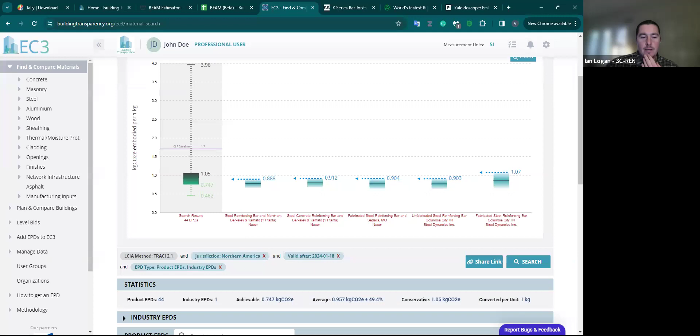We have one from Michelle wondering how often the CLF baselines are updated. Yes, so the CLF baselines are updated about every other year, I think. They first came out in 2019. There was a 2021 version, and the latest one is the 2023 version. And I know the CLF, the Carbon Leadership Forum, is currently working on another version, which will most likely be 2025.

Now, there is an important note that the methodology of the CLF baseline has changed significantly in this latest version, where in the past, they've actually tried to align the baseline with the conservative, the 80th percentile of the market. In the latest version, they're aligning it with the average of the market. So there's a shift in essentially what those CLF baseline numbers represent. So it's just one thing to note.

I think I might be able to actually demonstrate it here. Go back and do a general search. Right, so right now the 2021 CLF baseline listed here is 1.7 kilograms of CO2 equivalent per 1 kilogram. I can change the baseline using this gear icon and then go into 2023 industry average.

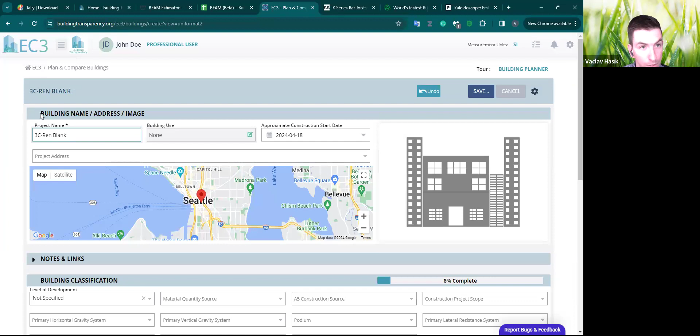Now, let's say we have, again, 3C-Ren blank project. Start with that. Now you can select project address again, just like you did in the two other tools in California. And you can add additional building classification information, etc. Now I'm going to skip over this part. This is more for bookkeeping purposes, again, if you're trying to benchmark projects.

The most important part of this project interface is at the bottom of the page. You do also want to still fill out the gross floor area. And this tool actually understands if you type in feet squared or meters squared, it will understand the differences in those units.

So just make sure that you just type it in. 3 floors, and those are the most critical fields. Now let's go all the way to the bottom.

Now this is structured in a uniformat structure right now, and we just kind of give you a template to start. You can open up all of the individual elements, and you can see that it's structured very similarly as what we saw in Tally LCA. You have individual systems, individual elements, and then you can start adding quantities and start linking EPDs.

So if we started from scratch and we wanted to, for example, capture concrete, 4,000 PSI or 5,000 PSI in the foundation, and let's say we have 100 cubic yards. Okay, so now we have the quantity. Now we can click on the EPD button, select the category, concrete, ready mix, next.

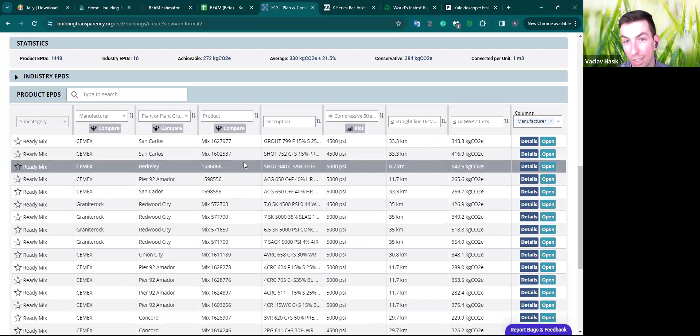In some cases, you can also provide an EPD request letter directly to the manufacturer of the product or the supplier. And we also have some template EPD request letters for you to use as well. All of those links will be in the slides, which will be shared with you after the course.

Now, let's say we actually wanted to select one of these products. It's as simple as clicking on the row. Actually, you need to click on the star button here and click on selected. For example, I just selected this Berkeley mix, 1536066. You can also select alternative materials, just as placeholders, if you wanted to consider additional products.

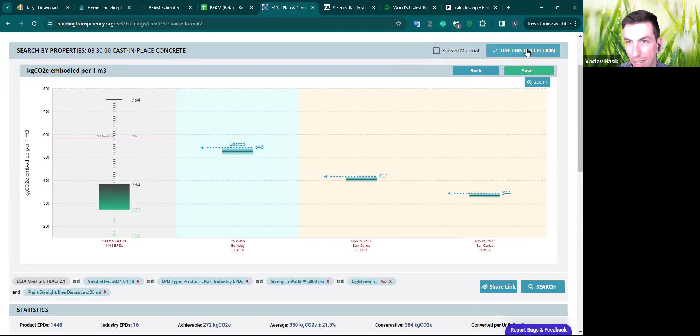And now if I scroll to the top, I can show alternates, and I can again see side by side what the impacts of the individual products are. Now the selected product is this one. So that's actually not a low carbon product, but that's okay. Once you're done with the selection, you click on use this collection.

Now you will see the product category that this is in, and you can also see the specific product that we selected by clicking the toggle up here. So we have the Cemex specific mix design, and there are also two other alternatives. So again, you would go through the entire project, select all the materials, define all the material categories. And in some cases, we also have additional calculators that help you estimate material quantities.

So if you wanted to, for example, estimate the amount of concrete per area of a slab, let's do square feet. Let's say we have a 1 foot thick slab, then this should help you calculate the total impact. It's a little bit confusing because I still have the SI unit setting here. Let's do meters squared, 0.5 meters.

Okay, and you see that this helps you calculate the quantity. There's actually a 3% overpour here. That's why we get the 3 in here as well. And so we have additional calculators throughout the tool as well, for example, studs, metal decks, etc.

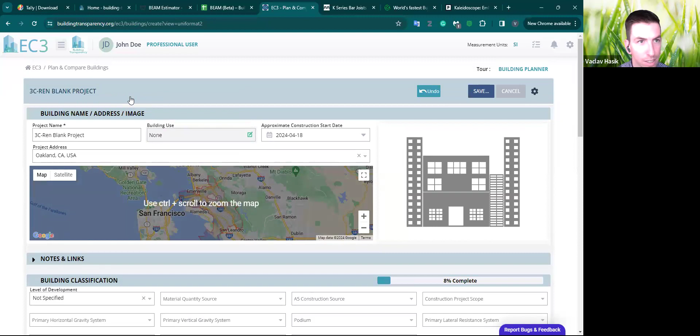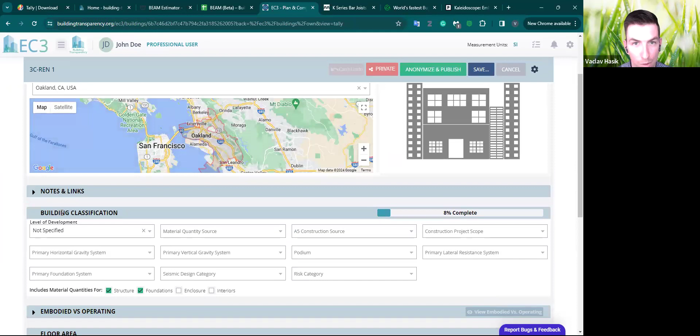Now, last thing I think that I will show in EC3, we'll take a look at a specific project that has been actually fully defined. So earlier, when I was preparing for this course, I exported all of the material quantities from Tally LCA into EC3. And so I was able to actually reuse some of the modeling that was done in Revit to get material quantities for that specific project that we've been talking about all day today.

So let's let this load a little bit. Now, this is right now shown in the MasterFormat setting, but you can also switch the view by UniFormat or custom format. I didn't actually organize it in UniFormat in this case, so I think if I do that, it's just going to all be under other. But if you wanted to, you could go and reorganize it in different ways.

And you can see that we have the individual material types. We have all of the quantity estimates that have been transferred. And we also have the types of materials predefined just based on the setting that was already selected in Tally LCA. Now, if we look at the overall project impacts here, and click on the chart setting, we can look at the Sankey diagram, for example. Now, this actually is not super helpful, but at least it's a little bit simpler.

What's happening here is that on the left side, you have the individual material types listed, and then the size of the bar is the contribution of the global warming potential to the rest of the project. For example, we can see that ready mix overall has the largest amount of contributing impact to the project.

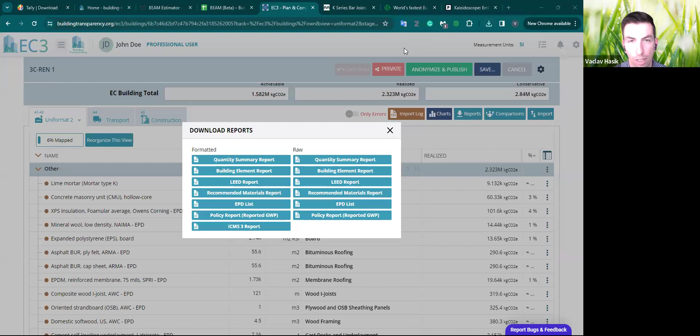And then we have the conservative estimate. This is if you didn't make any product-specific selections, like selecting that specific mix from a specific plant, like I did, right? This would be your starting point. So that essentially assumes the 80th percentile scenario for each of these line items, and it gives you that sort of starting point for the embodied carbon footprint of each element.

Now, if you make any product-specific selections, then those lower carbon footprint values would be reflected in the realized column. So you see that for most of these, the values actually don't change between conservative and realized. And that's because I didn't make any product-specific selections. But there are a couple where the numbers do change. So here I actually selected a higher impact material, which is not great.

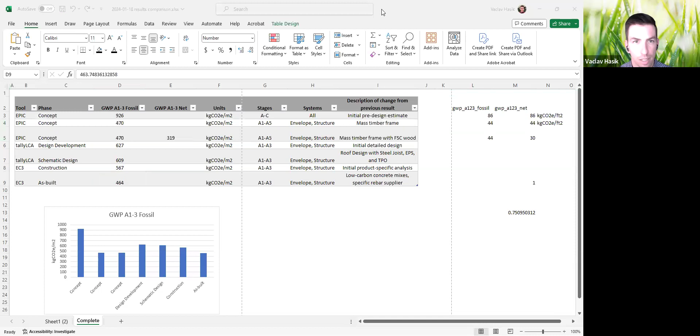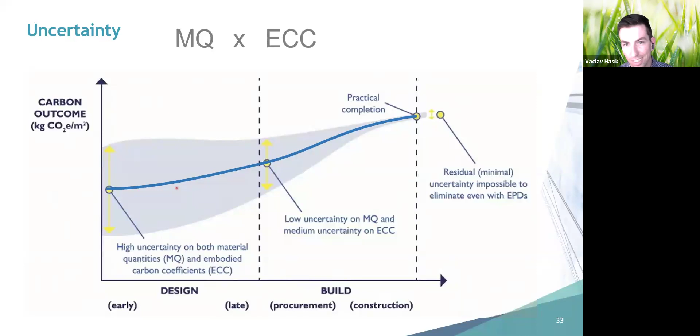Now, a couple of closing slides and also any last minute questions if you have. Again, just stressing that the uncertainty early in design is going to be much larger, right? So we saw, for example, we were at a lower number than later in design and later in construction in that specific case study. So just keep that in mind as well. There's always some larger uncertainty at the beginning of the design.

And there are some basic ways that you can lower the embodied carbon footprint of your projects. Reuse of buildings, reuse of products, then you can optimize the design and then choose materials and products. So all of these go in tandem. Different individuals on the design and construction teams obviously have different ways that they can contribute to the overall carbon footprint

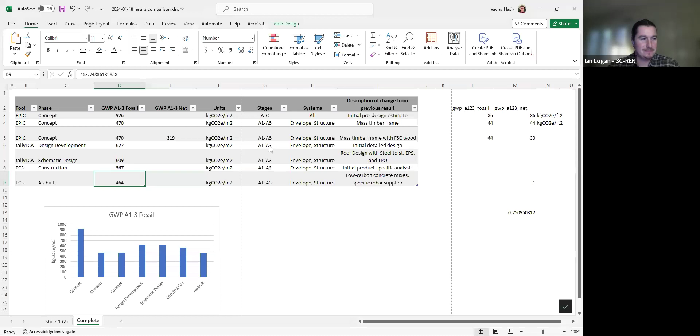I guess I'm curious, as LCA becomes part of code in California, just based on the sheer volume of LCA tools coming out, do you think there will be a universal one, or will it continue to be a plethora of options? I think it's still going to be a plethora of options, but there are some standardizations that are going on right now as we speak. There is a standardization of how elements and systems are actually described in some of these assessments, so that if you do an LCA in one tool, you can more easily compare it to another tool.

There's also more and more alignment in the data sources. So we at Building Transparency, in collecting all of the environmental product declaration data, are opening it up to other tools to use that same data, so that we pull from the same pool of information on the individual product level. Again, that's easier to align on the carbon footprint front than some of the other environmental impact aspects. So there are multiple ways that we need to address the alignment of different tools.

But I think there will always be a variety of tools available. I know right now it can be a little bit harder to choose the right tool because there are so many new ones popping up all the time. But I think that will also just steady out as well. Okay. Yeah, I think that's the motivation of hosting this webinar in particular, just honing in on a few options. We do have one other question from Michelle. Are there tools that can give good data on MEP systems?